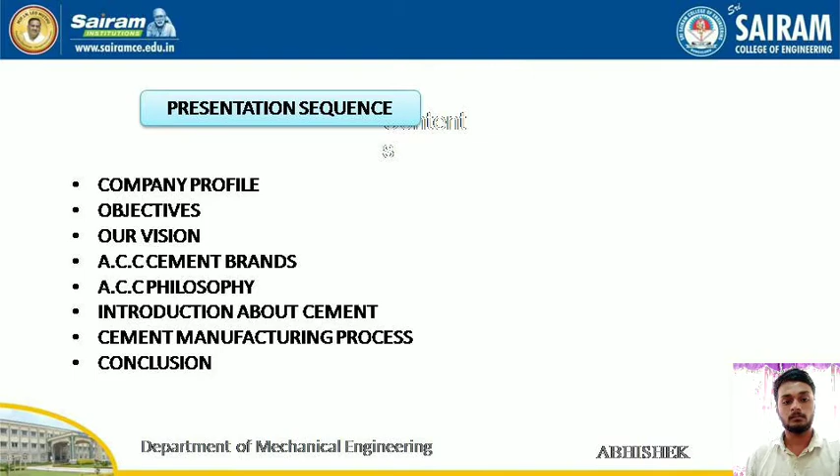Coming to the next slide, we have company profile of ACC Cement Limited. ACC Cement Limited is India's foremost manufacturer of cement and concrete. The company is engaged in the manufacturing and selling of cement and ready-mix concrete. They manufacture a range of Portland cement for general construction and specific application. In addition, they also offer two products, namely bulk cement and ready-mix concrete.

The company's operations are spread throughout the country with 17 modern cement factories, more than 50 ready-mix concrete plants, 21 sales offices, several zone offices, and a vast distribution network of over 10,000 dealers. ACC Limited is India's foremost manufacturer of cement. ACC has been a pioneer and trendsetter in cement and concrete technology.

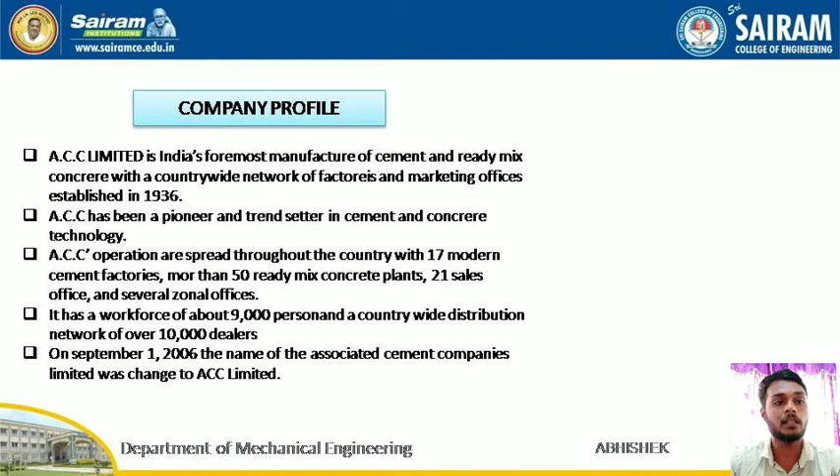ACC cement operations are spread throughout the country with 17 cement factories and more than 50 ready-mix concrete plants. It has a workforce of about 9,000 persons and a country-wide distribution network of over 10,000 dealers. On September 1, 2006, the name of the Associated Cement Companies Limited was changed to ACC Limited.

Moving to the next slide, here we will discuss the objectives, vision, mission, and values of the ACC cement industry. There are 3 main objectives of the company: first, to increase the sale of ACC cement; second, to generate scope of ACC Gold; and last, to increase brand equity. The vision of ACC is to be one of the most respected companies in India, recognized for challenging convention and delivering on our promise.

Moving to the mission of the company, the college provides comprehensive educational programs and services to advance our diverse population and empower lifelong learners to succeed as global citizens. And moving to the values of the ACC cement factory, these are the values: access, inclusion, collaboration, innovation, and excellence.

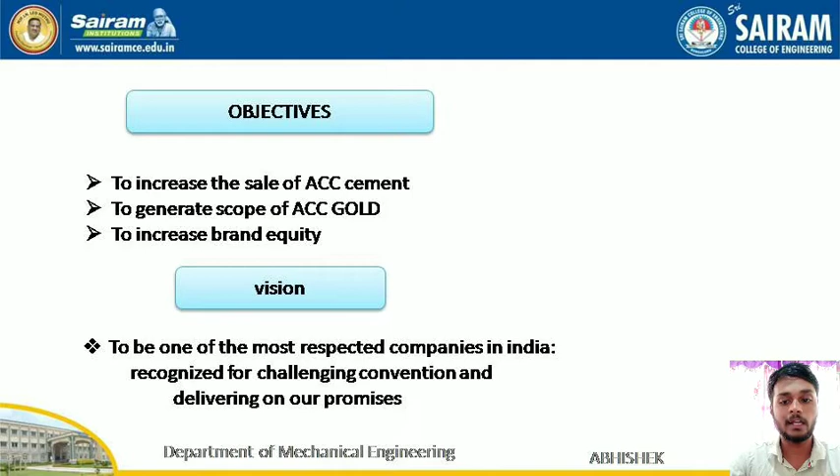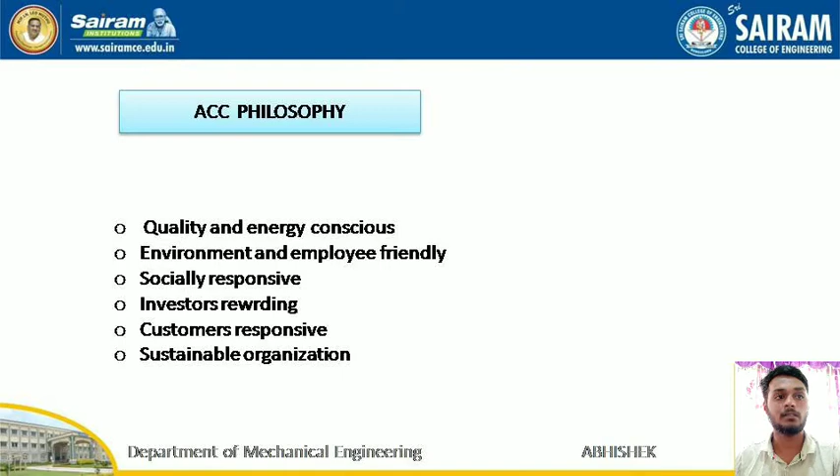Moving to the next slide, we have introduction about cement. Cement in general is an adhesive substance of all kinds, but in a narrow sense, the binding material used in building and civil engineering constructions. Cements of this kind are finely powdered and, when mixed with water, set to a hard mass. Setting and hardening result from hydration. Cement is a fine greyish powder which, when mixed with water, forms a thick paste; mixed with sand and gravel and allowed to dry, it is called concrete.

There are 2 types of cement, namely non-hydraulic cement and hydraulic cement. Non-hydraulic cement will not set in wet conditions or underwater. Rather, it sets as it dries and reacts with carbon dioxide. Non-hydraulic cement such as slaked lime hardens by carbonation in contact with carbon dioxide present in the air.

First, calcium oxide is produced from calcium carbonate by calcination at a temperature of about 825 degrees Celsius for about 10 hours at atmospheric pressure. And moving to hydraulic cement, for example Portland cement, it sets and becomes adhesive due to a chemical reaction between the dry ingredients and water.

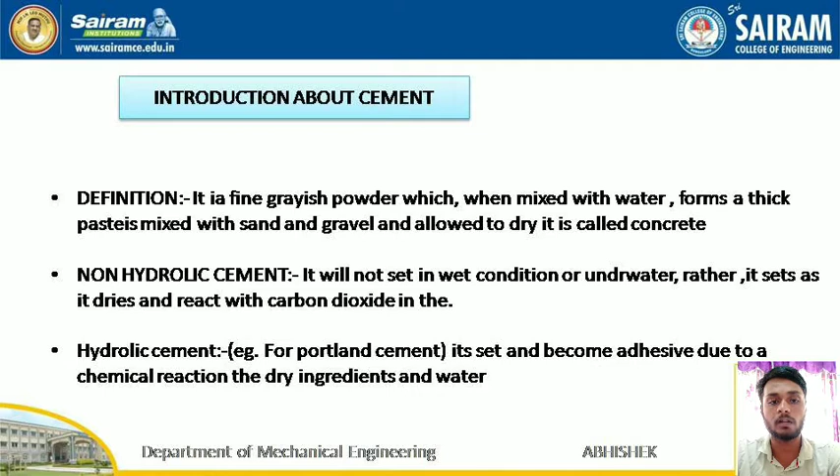A type of cement that sets very quickly and hardens with the addition of water to the finely ground cement is called hydraulic cement. It is the most commonly used cement at present. Hydraulic cement is a product used to stop water and leakage in the concrete and in a structure. It is a type of cement similar to mortar that sets extremely fast and hardens after it has been mixed with water.

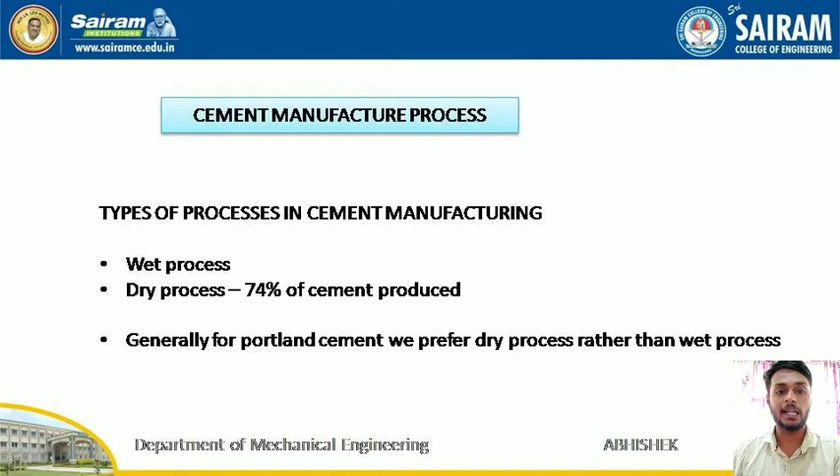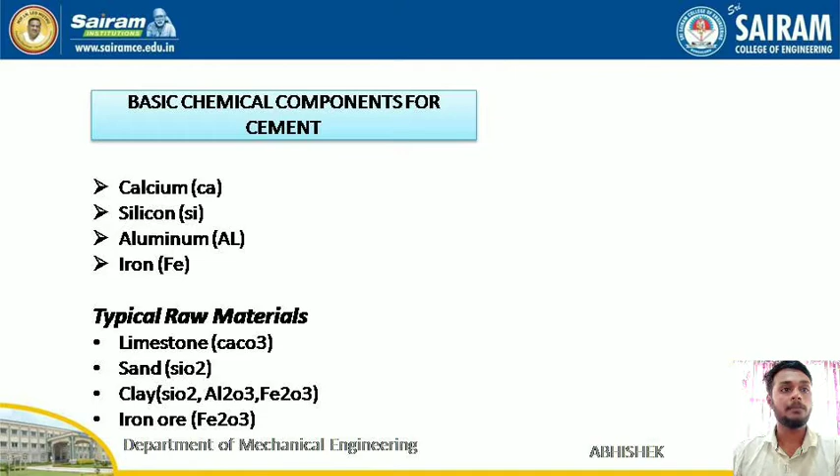Moving to the next slide, we have the cement manufacturing process. There are two types of process in cement manufacturing: wet process and dry process. Mostly 74% of cement produced is through the dry process. Generally for Portland cement, we prefer the dry process rather than the wet process. Basic chemical components for manufacturing of cement are calcium, silicon, aluminium and iron. Typical raw materials used in the manufacturing of cement are limestone, sand, clay and iron ore.

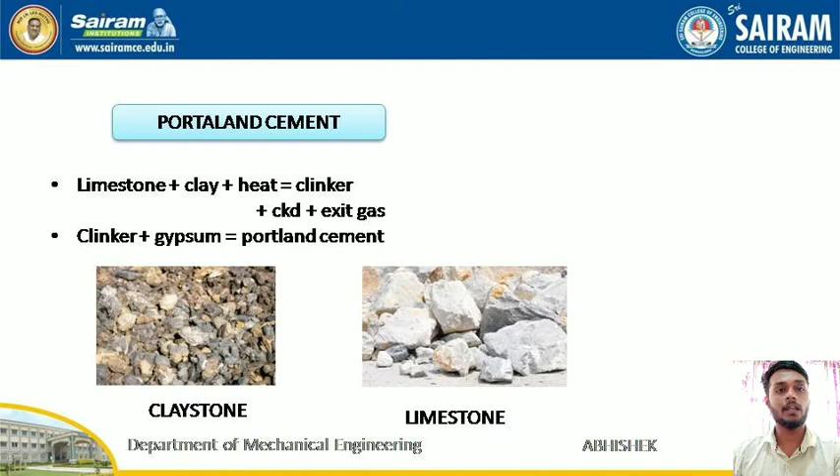Moving to the next slide, we have the manufacturing process of Portland cement. Portland cement is the most common type of cement in general use around the world. It is a basic ingredient of concrete, mortar, stucco and non-specialty grout. It was developed from other types of hydraulic lime in England in the early 19th century by Joseph Aspdin, usually from limestone. The first step in the manufacturing process of Portland cement is mixing of raw material.

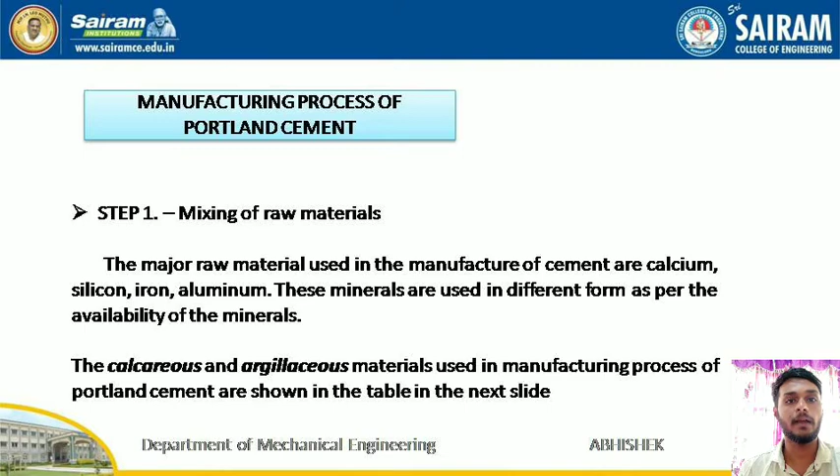The major raw materials used in the manufacturing of cement are calcium, silicon, iron, aluminium. These minerals are used in different forms as per the availability of the minerals. The calcareous and argillaceous materials used in the manufacturing process of Portland cement are shown in the table in the next slide. Coming to the calcareous material, they are divided as calcium, silicon, aluminium and iron.

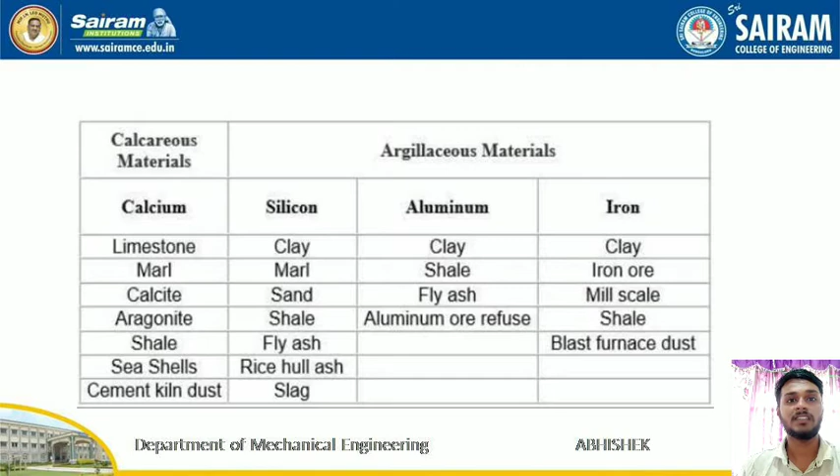Under calcium comes limestone, marl, calcite, shale, seashells and cement kiln dust. Under silicon, clay, sand, fly ash and slag. Under aluminium, clay, fly ash, aluminium ore refuse. And under iron, clay, iron ore, mill scale, shale, blast furnace dust.

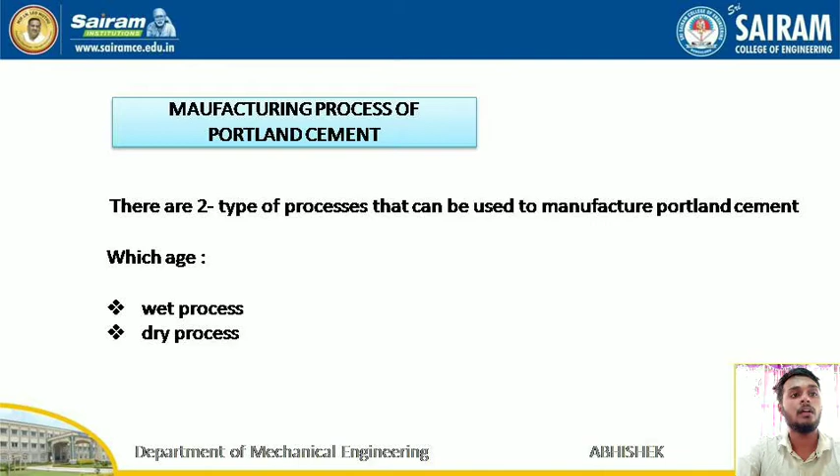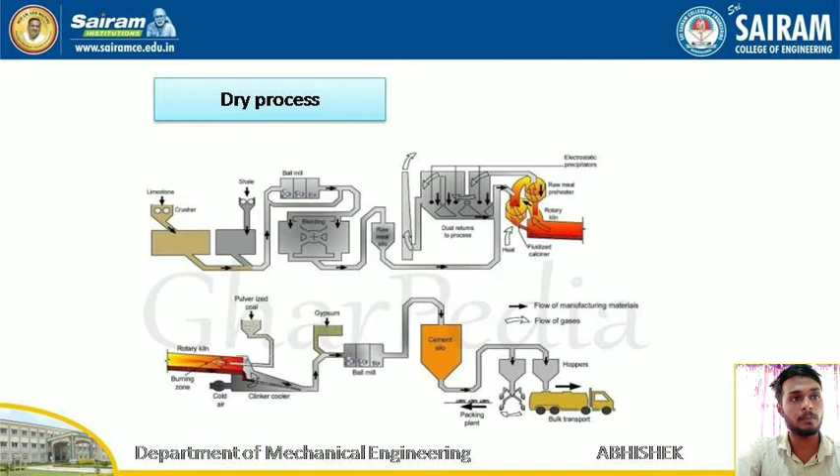To the next slide, we have the manufacturing process of Portland cement. As I said earlier, there are two types of process that can be used in the manufacturing of Portland cement, which are wet process and dry process. Moving to the dry process, here is the graphical representation of how it is manufactured from the base to the packaging.

Dry process. The raw meal is blended by passing compressed air to obtain a uniform and intimate mixture. Compressed air induces upward movement of the powder and decreases its apparent density. The air is pumped over one quadrant of the silo at a time, and this permits the apparently heavier material from the non-aerated quadrants. Therefore, the aerated powder tends to behave like a liquid, and in a total period of about 1 hour a uniform mixture is obtained.

In some cement manufacturing plants, continuous blending is used. The blended meal is further passed into a sieve and then fed into a rotating disc called a granulator. In the dry process, both calcareous and argillaceous raw materials are first crushed in gyratory crushers to get 2 to 5 centimeter size pieces separately. The crushed materials are again ground to get fine particles in a ball or tube mill. Each finely ground material is stored in a hopper after screening.

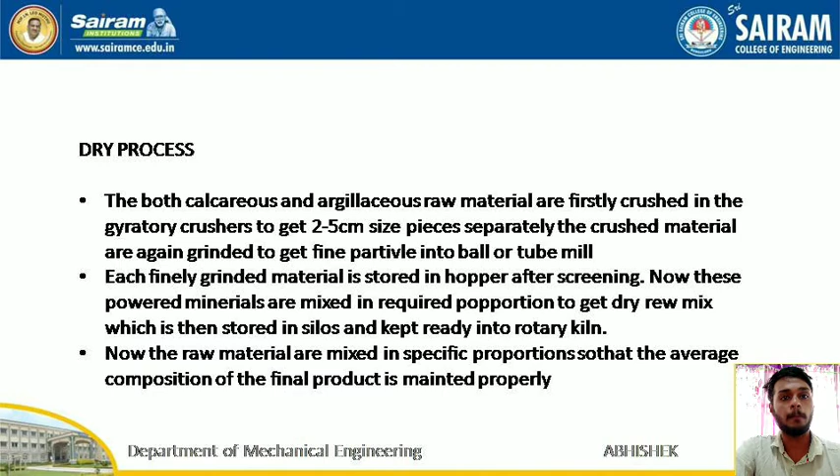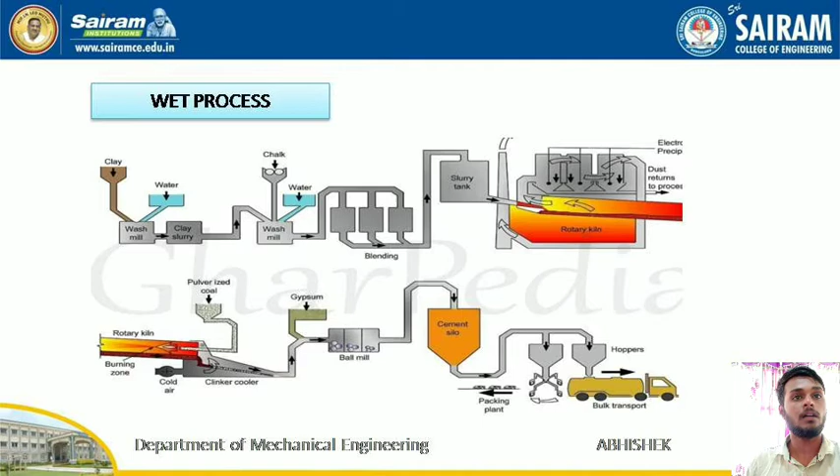Now these powdered minerals are mixed in required proportion to get dry raw mixes. The raw materials are mixed in specific proportions so that the average composition of the final product is maintained properly. Moving to the next slide, we have the wet process. This is the graphical representation of how it is manufactured. Wet process. The raw materials are first crushed and made into powdered form and stored in silos. The clay is then washed in washing mills to remove adhering matter found in clay.

The powdered limestone and water-washed clay are sent to flow in the channels and transferred to grinding mills, where they are completely mixed and the paste is formed that is known as slurry. The grinding process can be done in a ball or tube mill, or even both.

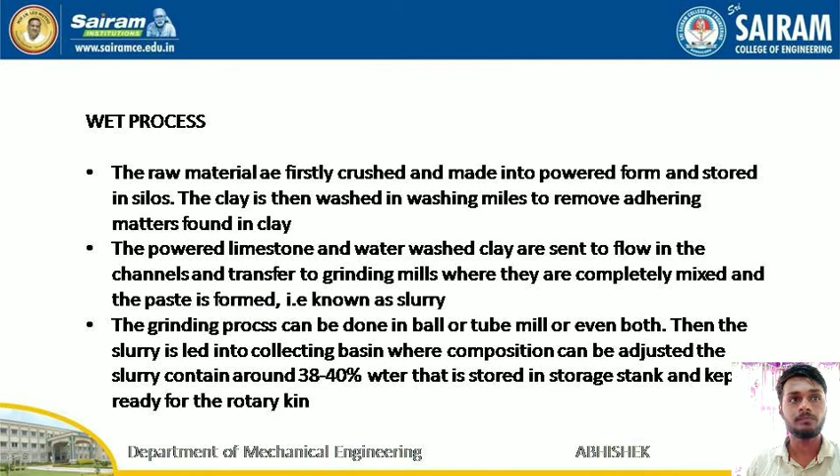Then the slurry is led into a collecting basin where the composition can be adjusted. The slurry contains around 38 to 40% water; it is stored in a storage tank and kept ready for the rotary kiln. This is the representation.

The calcareous materials and the argillaceous material go to the jaw crusher. Then the water is transferred to that crusher. It goes to the bin and then it is transferred to mixing and pulverizing, and then it flows to the rotary kiln, where air is passed as a primary supplement, and then the clinker grinder, and the outcome of the clinker grinder is Portland cement.

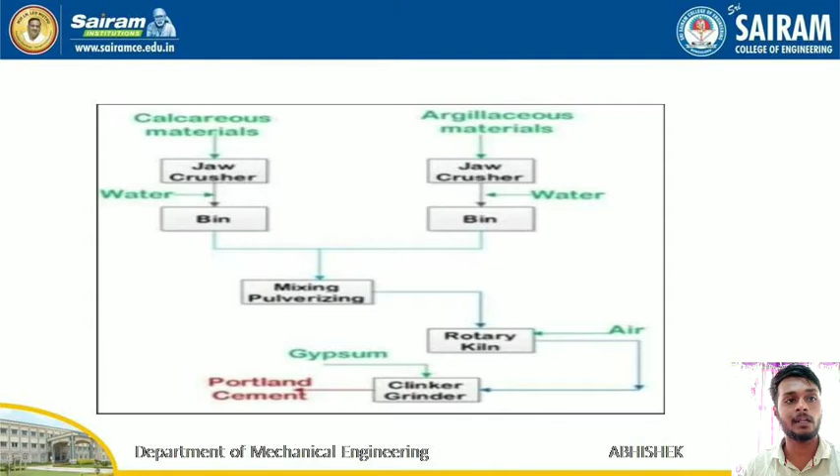Step 2, grinding of clinkers. The cooled clinkers are received from the cooling pans and sent into mills. The clinkers are finely ground into powder in a ball mill or tube mill. Powdered gypsum is added, around 2 to 3%, as a retarding agent during final grinding. The final obtained product is cement that does not set quickly when it comes in contact with water.

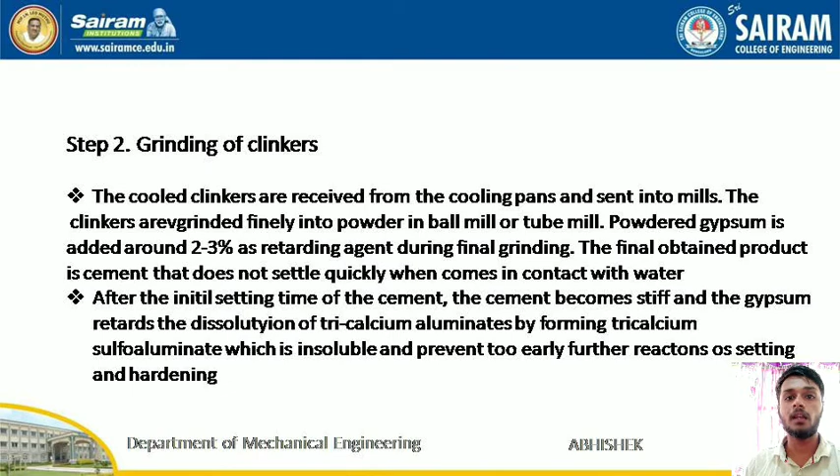After the initial setting time the cement becomes stiff, and the gypsum retards the dissolution of tricalcium aluminates by forming tricalcium sulfoaluminate, which is insoluble and prevents too early further reaction of setting and hardening.

And the last is storage and packing. The ground cement is stored in silos, from which it is marketed either in container loads or 50 kg bags. This graphical representation shows ACC cement production from 1998 to 2020.

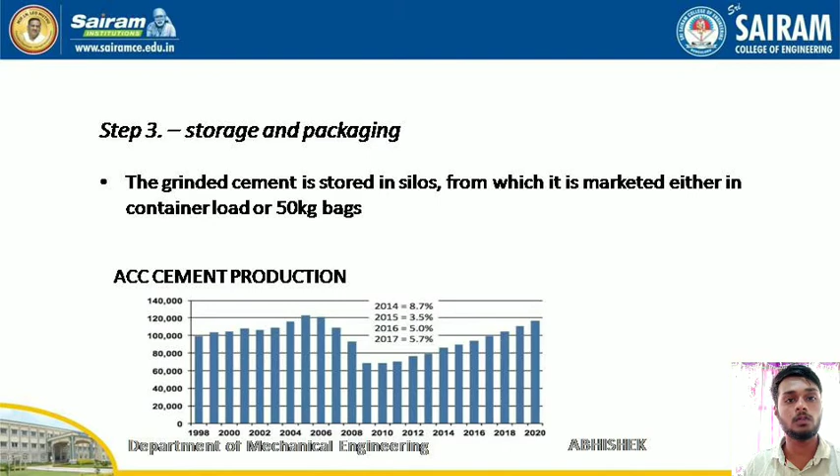Moving to the next slide, we have stackers and mine crushers which are used in the cement manufacturing process. What do you mean by crusher? Manufacturing company L&T; the dimension of the crusher diameter is 1800 and the width will be around 2200. Stackers. At stackers there is another crusher which is used to separate some small size material for testing purposes. It will rotate in a time period of 7 to 8 minutes.

And next, reclaimer. A reclaimer is a large machine used in bulk material handling applications. A reclaimer's function is to recover bulk material such as ores and cereals from a stockpile.

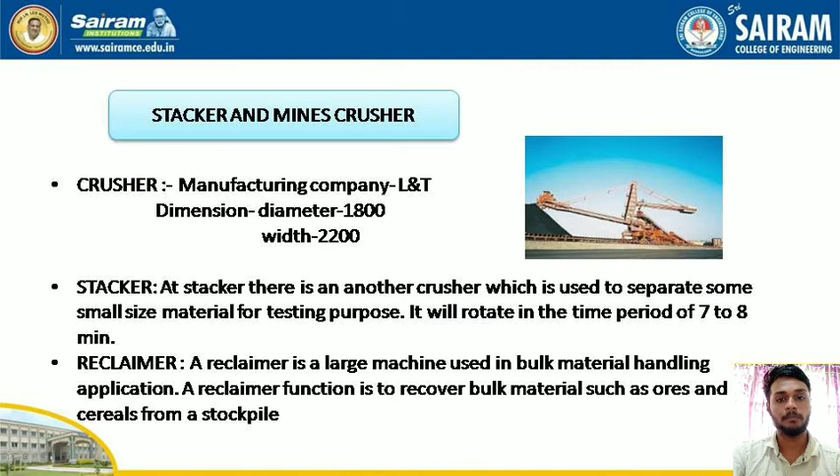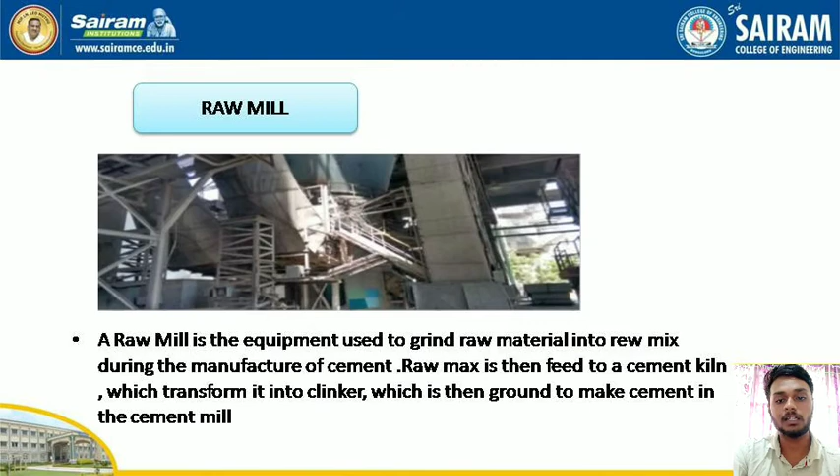Next we have a raw mill. A raw mill is the equipment used to grind raw material into a raw mix. During the manufacture of cement, the raw mix is then fed to a cement kiln, which transforms it into clinker, which is then ground to make cement. In the cement mill, the raw milling stage of the process efficiently defines the chemistry of the finished cement.

Next, we have the kiln mill. The cement kiln is used for the pyroprocessing stage of manufacturing Portland and other types of hydraulic cement, in which calcium carbonate reacts with silica-bearing minerals to form a mixture of calcium silicates.

Over 1 billion tons of cement are made per year, and cement kilns are the heart of the production process. Their capacity usually defines the capacity of the cement plant, as the main energy-consuming and greenhouse gas emitting stage of cement manufacture.

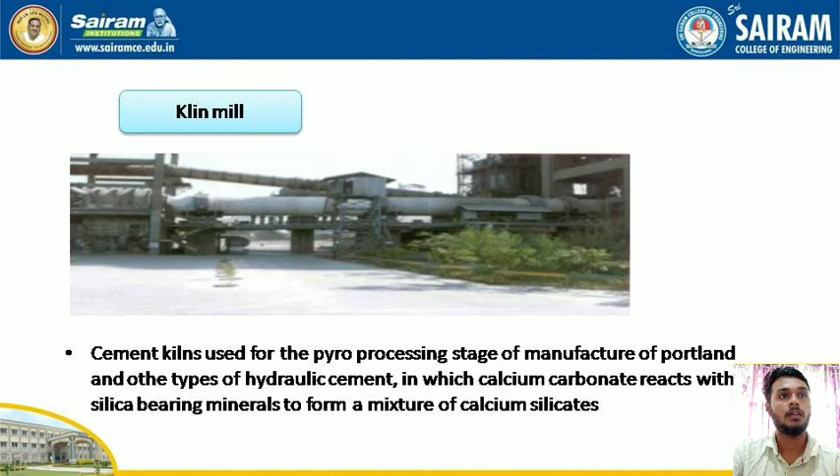Moving to the cement mill hopper. A cement mill is the equipment used to grind the hard nodular clinker from the cement kiln into the fine grey powder that is cement. Most cement is currently ground in ball mills and also vertical roller mills, which are often more effective than ball mills.

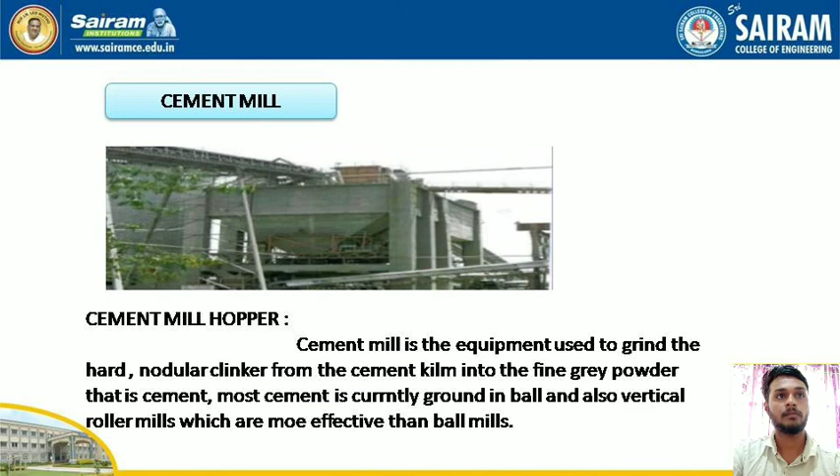The cement ball mill is mainly used in the grinding of cement finished product and raw material, also in the chemical, electrical and other industries, and can also be used in open circuit, but also in closed circuit with a separator as a grinding circuit. Here comes the packing plant, where the cement gets packed and is ready for delivery and sale.

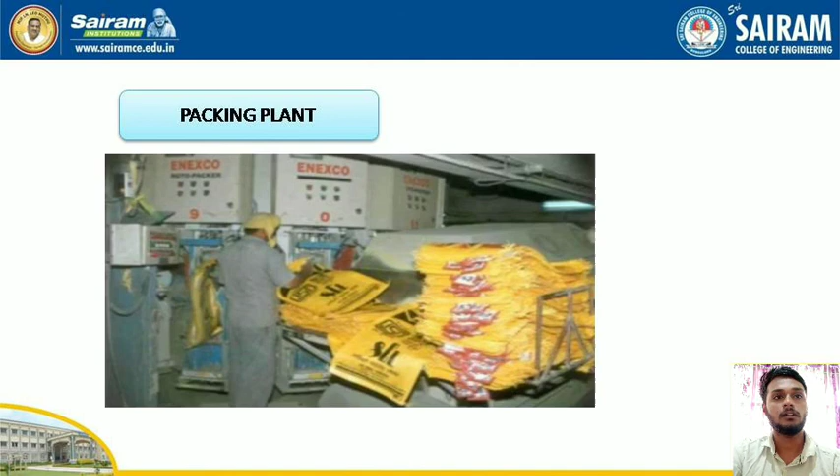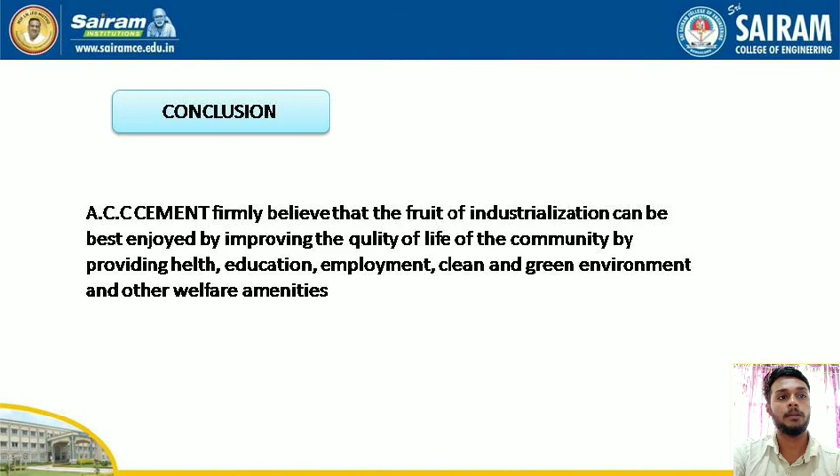And lastly comes the conclusion, that is, ACC Cement firmly believes that the fruits of industrialization can be best enjoyed by improving the quality of life of the community by providing health, education, employment, a clean and green environment and other welfare amenities.